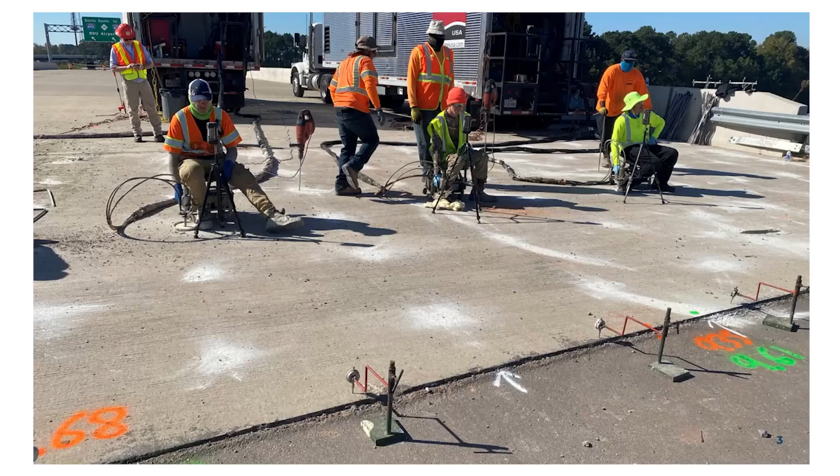Regardless, it's a problem, because we're spending hundreds of thousands and millions of dollars doing this, or grouting. These guys here are injecting polyurethane foam into a settled approach slab. We have DOT crews that do it internally with grout. We're spending lots of money when our approach slabs settle to jack them back up so we get a good ride, so we're not jumping on these bridges. It's a major problem.

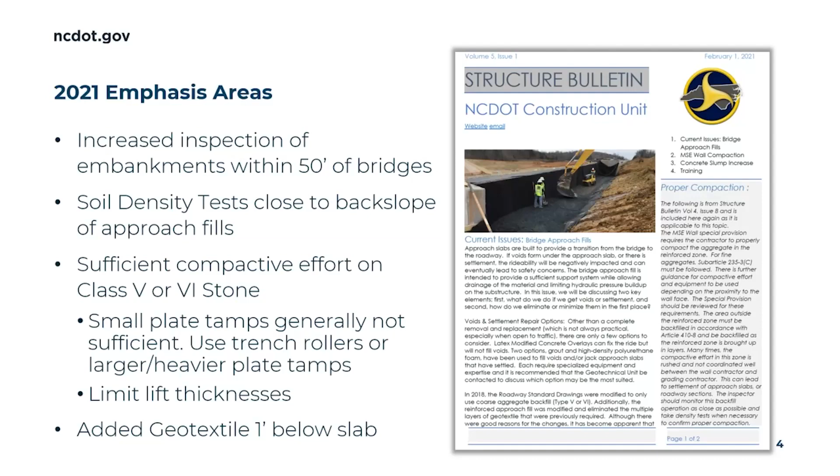So in 2021, we sent out a structure bulletin - now you all know how to get a hold of the structure bulletins since you've signed up for them. We also wrote a memo from the state construction engineer with some emphasis areas because we were seeing a lot of issues. We said we want increased inspections within 50 feet, taking more soil densities close to the back slopes, and more compaction on our stone in the backfill area, limiting the lift thickness of the stone in that area.

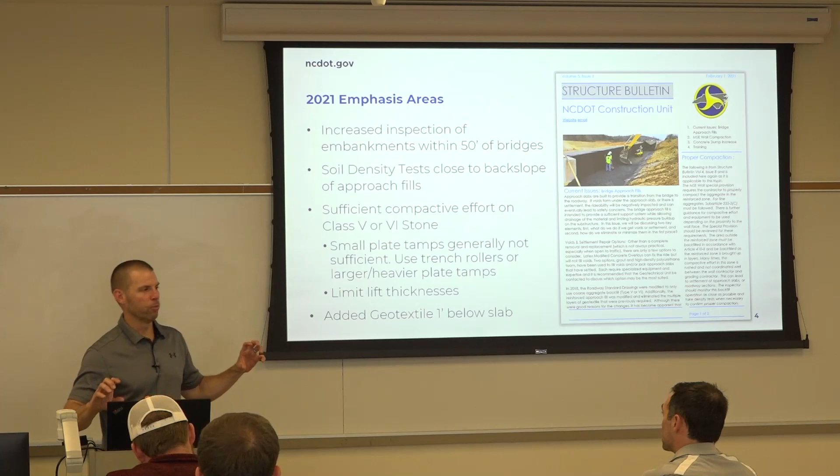We added a layer of geotextile a foot below the approach slab. The reason is our approach fills are filled with 78M or 57 stone, with a lot of voids in between. When you inject polyurethane foam and grout, where does all that grout go? Into those voids. So we added a layer of geotextile a foot below, so that when they have to pump, it gives it some base to not continue going through, and they can actually jack it up without wasting material. Those were our emphasis areas.

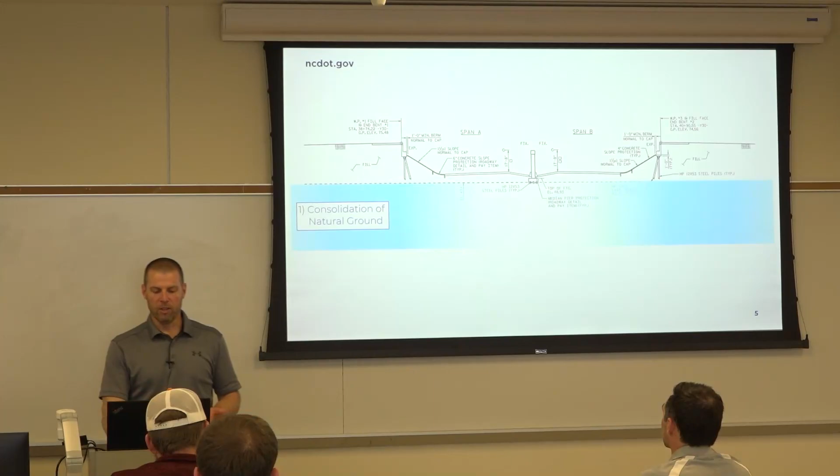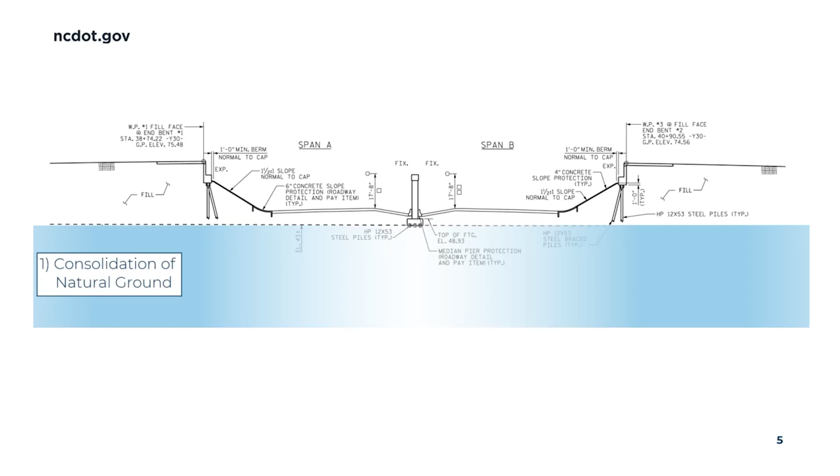Still having some issues, so let's look at where we can get settlement from. When we put an embankment where there wasn't one before, that new load is going to consolidate the ground - it's just going to happen. It's dependent on the type of soil, the amount of water, and so forth. So you can get consolidation of the natural ground.

When we build our embankments, we have specs and take densities, but depending on the material, how well they do that is just a representative sample. If they put too thick of lifts, don't build it properly, or don't get enough compaction, we can get settlement in our embankment. The third place is approach fill settlement, where we're putting stone in - we can get settlement, lose material, get voids, and that starts to lose more material.

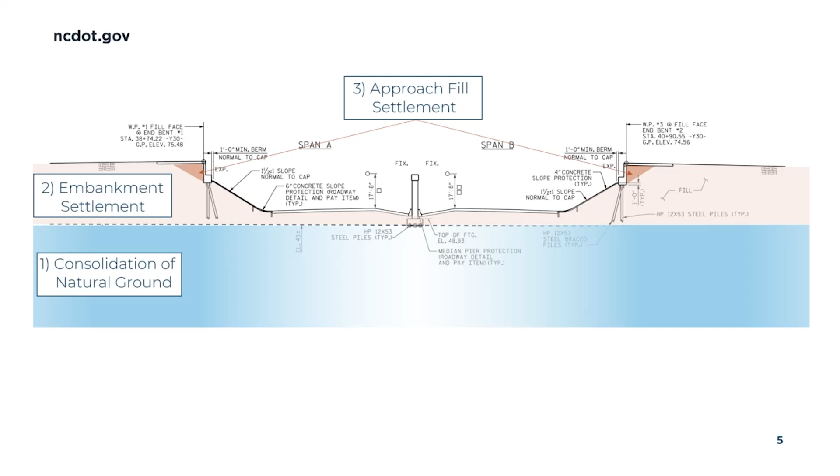Which ones do we have control over in this room since Tom Santee and Geotech left? Approach fill and embankment, if you're a roadway inspector - we have that control. Number one, the consolidation - Geotech's going to tell us that. They know, they've got it modeled, they know the borings, they know how much weight we're putting on from that embankment. They can predict pretty reasonably close how much settlement over time they can anticipate, and it's going to happen, so they account for that.

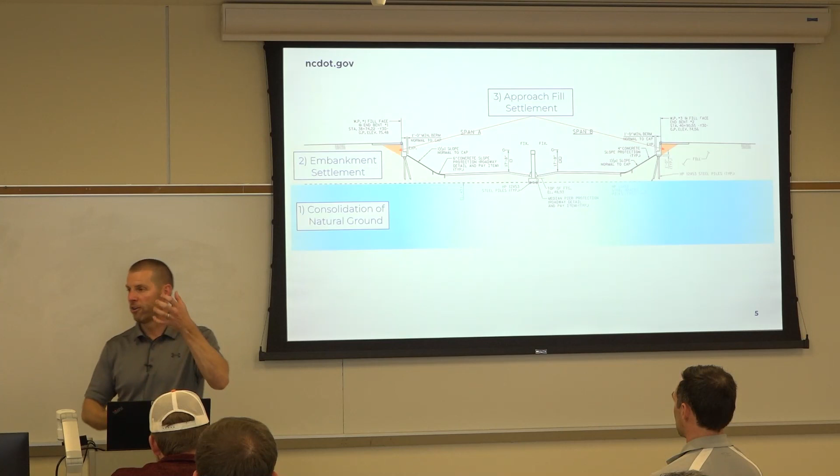Have you ever had a settlement period on your project? You build it up, wait a month, 2 months, 6 months, monitor it sometimes - that's up to Geotech, we trust they're doing that right. The next thing is embankment settlement - sometimes we have settlement times on that as well. Geotech won't have that modeled as much because we don't know exactly the material they're going to use, but proper installation and density tests to confirm they're doing it correctly can control if we have any settlement there.

And then the approach fill settlement, based on how good of a detail we have and how good of a job we do building it - those are things that are in our control.

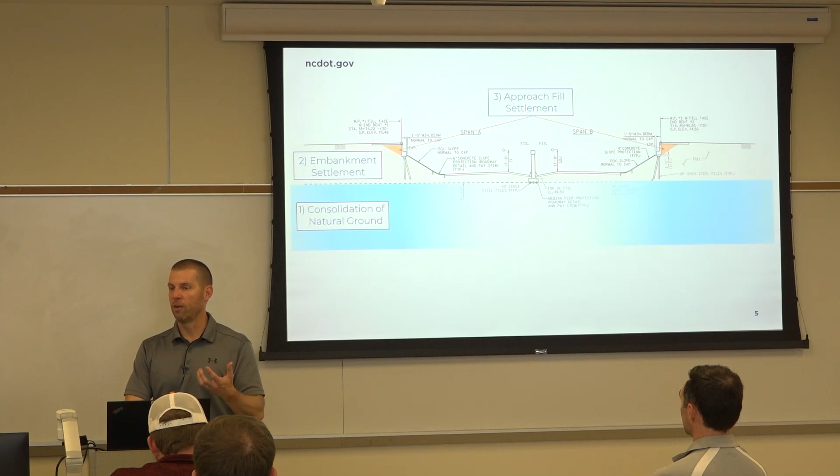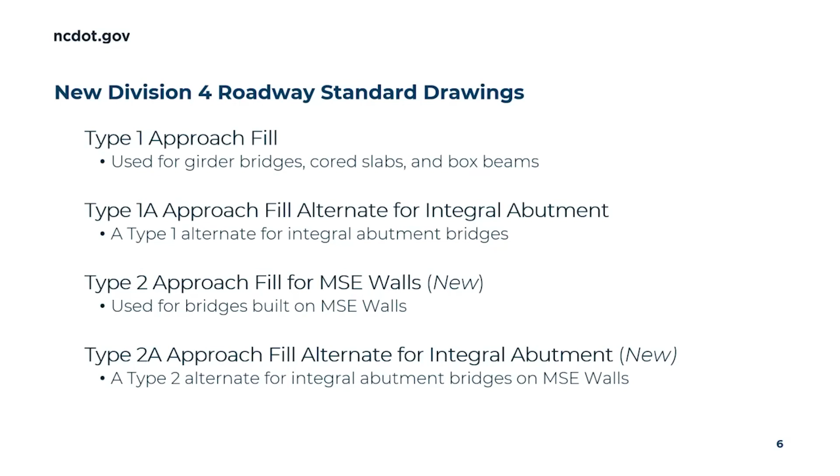We're in the middle of updating our roadway standard drawings, just like we are the specs. We're looking at doing 2 different types of approach fills with alternates for integral abutments. Integral abutments are when the concrete's poured around the ends of the girders, and instead of having an expansion joint, they move back and forth as the piles bend a little bit. Contractors sometimes build a temporary fabric wall behind it, because you don't pour the top part of the integral cap until after the deck is poured - it's the last thing you do. They build that temporary wall so they can walk right up on the deck instead of having a big hole there. That's what the 1A and 2A alternates are for.

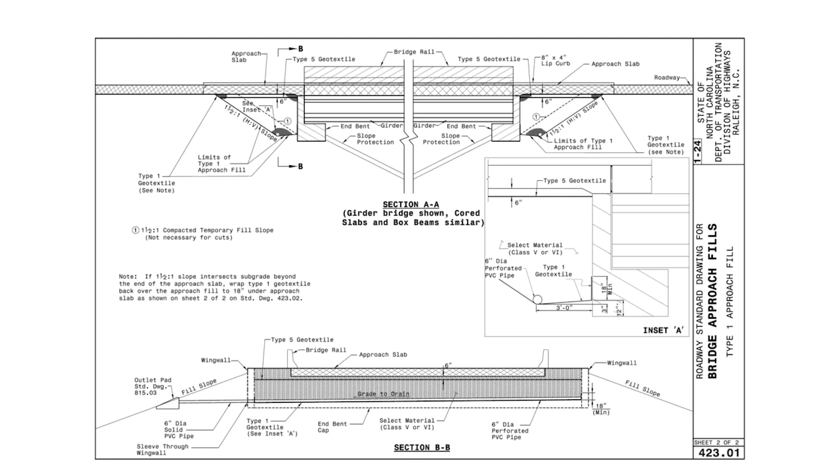So we thought we were done with these drawings. We've been talking about this for about 2 years now, since 2021. We had proposed changes, and we realized there was an issue with our details about 2 or 3 weeks ago in Winston-Salem at the structure training, so we're kind of back to the drawing board, but I'm going to show you some of the changes we're making.

First of all, we're going to continue to show that geotextile below our approach slab. It's going to be 6 inches, at least that's where we're showing it right now.

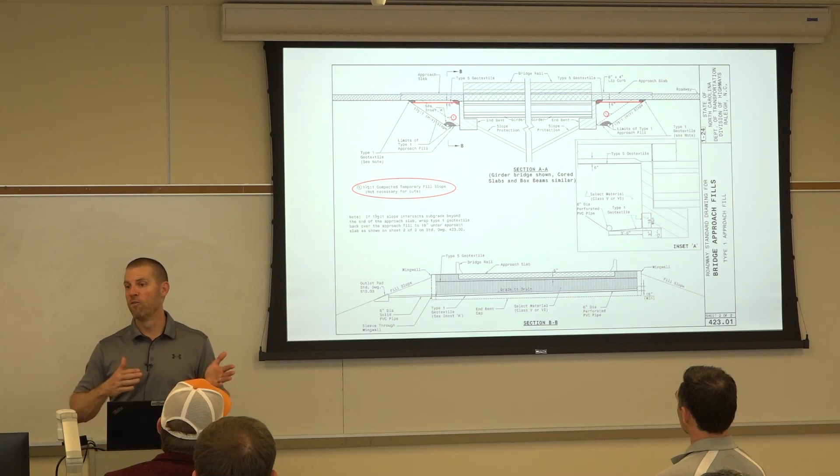This is one of the big changes I think is going to improve things. We're going to actually require a temporary slope. They're going to have to overbuild the embankment, right? Because right now our specs, if you got an embankment, all they have to do is build it to the bottom of the cap. Years ago, we used to make them build the whole embankment all the way up.

Then they had to cut back out for the end bent. Well, now the specs allow them to build to the bottom of the cap, and that allows them to start on the bridge construction. But what we're going to do is, when they finish building the rest of this embankment out of soil, we're going to make them overbuild it. The reason is when you compact that edge, you're not going to get all the way up on that roller - you can get close to it, but you're not going to get compaction all the way to that edge. So we're going to make them build that 3 feet more, and then they're going to cut that back out so they've got good compaction in that area.

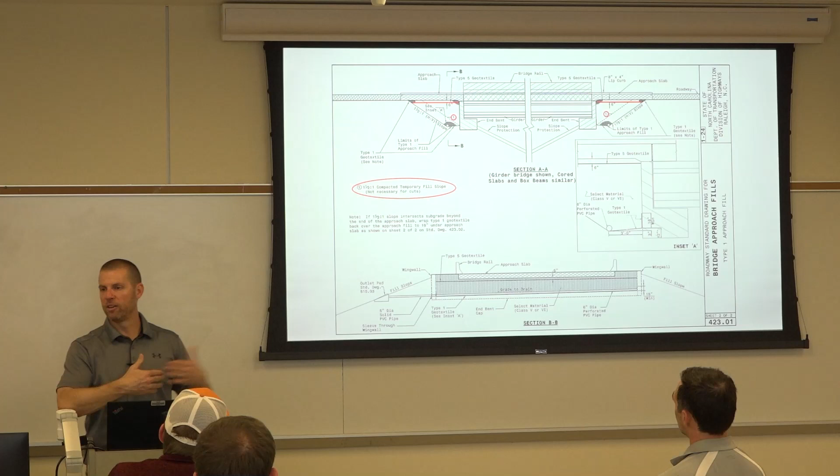So we feel like that will be a big improvement. And then this back slope - there used to be 2 different details. One was for our sub-regional, like cored slabs and box beams and so forth, and it was sloped at 1-to-1. And then our other bridges, you'd slope it back like 4 feet beyond the approach slab. This one, we're basically saying you're just going to go 1.5 to 1. Wherever it ties on the approach slab is where it ties. So that changes - kind of combines those 2 details.

And we're also going to raise up the bottom of it about a foot, 12 inches or so. You see our pipe here - this is where we found the problem. You see how by raising it up it forces you to go through the wing wall. We want to raise that up, but the problem that somebody pointed out is when you do that and have that fixed point on the wing wall, if you get settlement, we've had that pipe get crushed and broken and break the joints.

So what we're talking about doing is just eliminating the pipe. We'll still have it drain to that spot and drain over to the wall. It'll go through the type 1 geotextile - we might put some hardware cloth there, and it'll just drain through. We'll still have a pipe that sticks out from the wing wall out to our drainage.

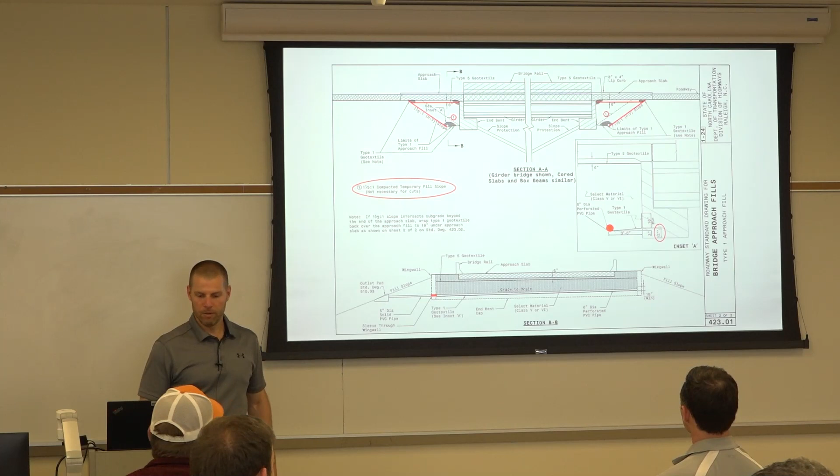What's that? Oh, okay. Sorry. Yep.

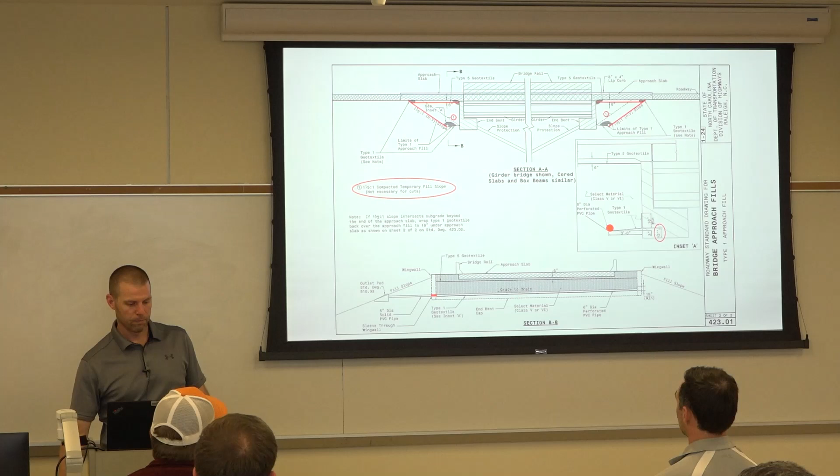Okay, so there we go. See through our wing wall there - that's the sleeve. So we're still working out the details. You'll see what the final details show, so don't get too hung up on that. We'll get those out and they'll be ready for the spec.

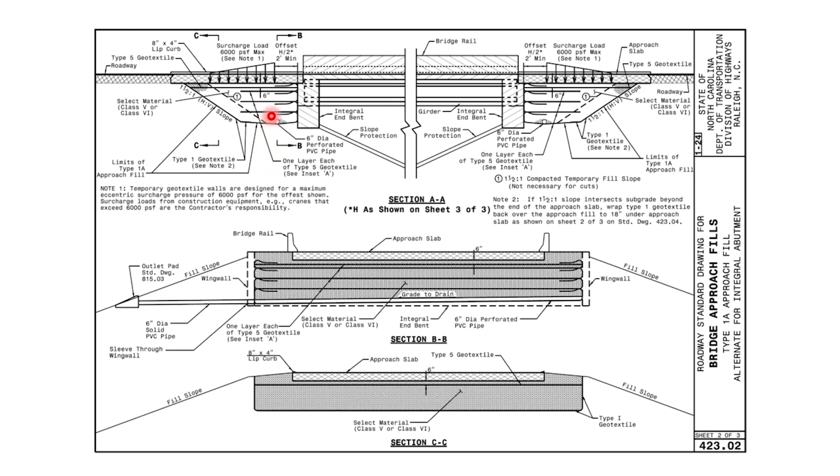This is the alternate for the integral abutment. You can see the temporary wall that you can build up here behind your integral end bent.

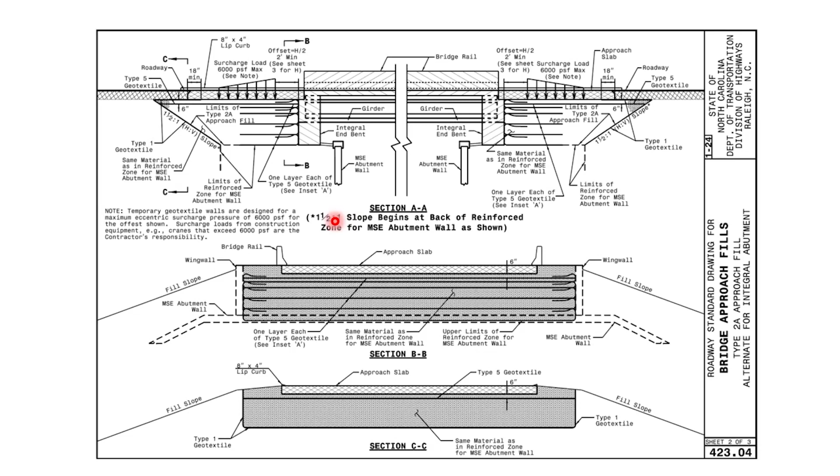This is a detail for MSE walls. Currently these are in your set of plans, but they're not a standard drawing. These have not really changed much from what's in your plans, but we're going to make it part of the standard drawings. And then here's the alternate for the integral, for the integrals with the MSE wall.

So again, don't want to get too hung up on this, but I do want to drive home some points here. We've got these emphasis areas, and the special provisions are actually going to require some of these things instead of them just being an emphasis area. So we're going to start saying you have to take a density every 2-foot lift when you're within 50 foot of a bridge. So if you're a roadway density person, sorry, it's a little bit more densities, but we want to ensure there's more samples - we're getting really good compaction in that 50-foot range.

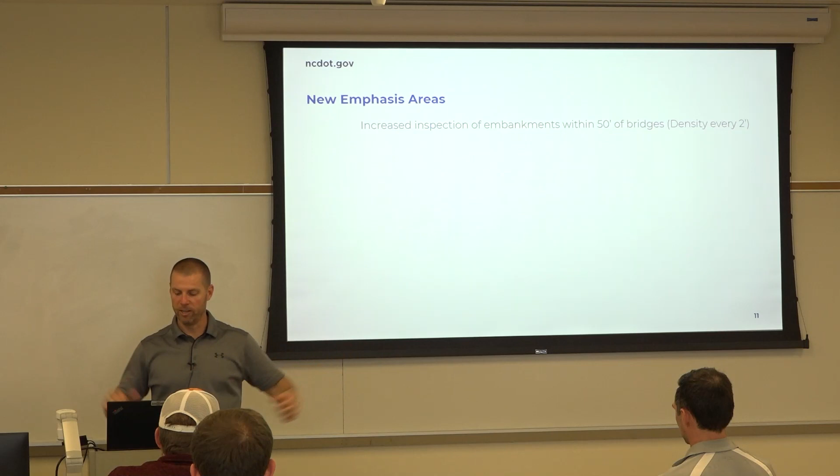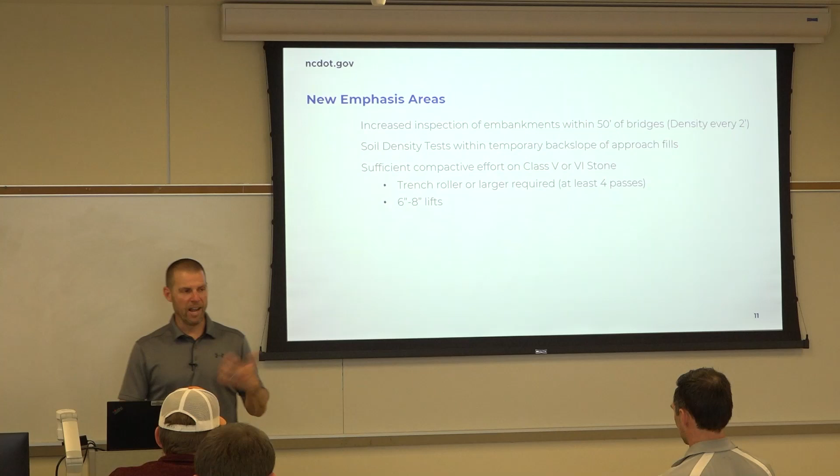That area around where we're cutting back to, we want to get some densities in that area to make sure they're getting good compaction in that zone. We're going to actually require smaller lifts on our stone. Some people think that stone is self-compacting. It still requires some compactive effort, and putting in a 12-inch lift with a little small plate tamp is not getting it. We've got to put it in with like a Rammax, a trench roller, and smaller lifts. Okay, so that's going to help.

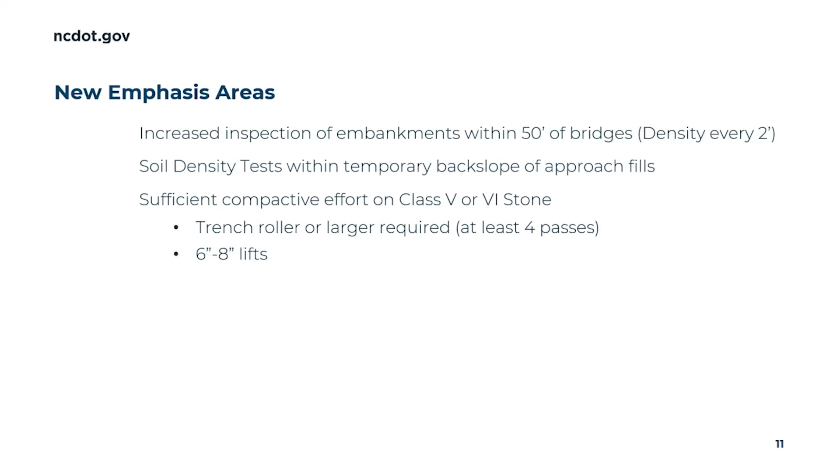One thing we have noticed, MSE walls, a lot of times we'll build them out of stone. You're putting big smooth drum rollers in there. We don't notice the settlement like we do in our approach fills. So some of that's because they're rolling it more. We can't still get those big equipment in there, but we can get a little bit heavier equipment, and we can roll it more and do smaller lifts.

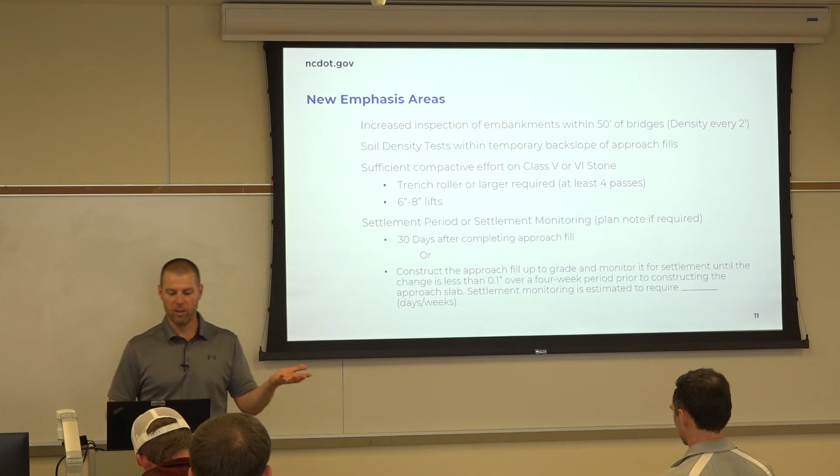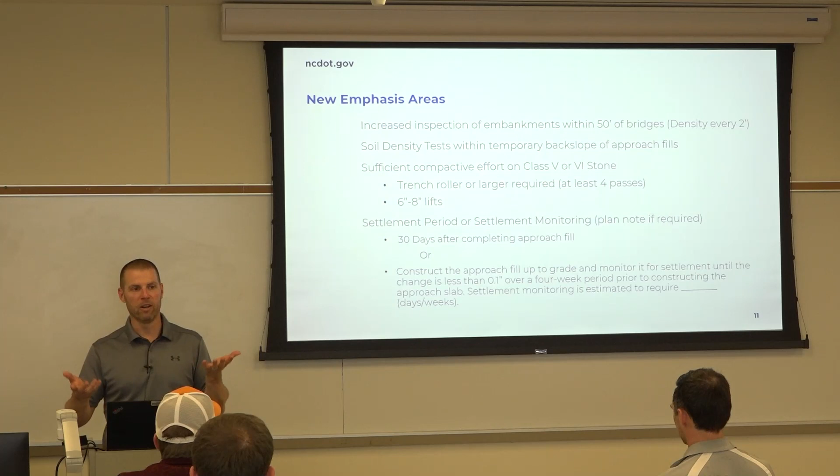And then we're going to be looking at either, it might be in your plans, you might have like a waiting period after you do your approach fill, or they're doing this in the West, they're actually driving hubs in their approach fill, and they're shooting them weekly or every few days, and they're monitoring the settlement. They're putting something like it's not a settlement gauge like the full settlement gauge we do sometimes on our embankments, but they're just doing this as a plan note and putting hubs in there and shooting it until it stops settling to a certain amount, and Geotech would make that decision. They could put in there that it's estimated to take 1 month or 2 months, so the contractor knows. So those are some of the things that you might see in your plans.

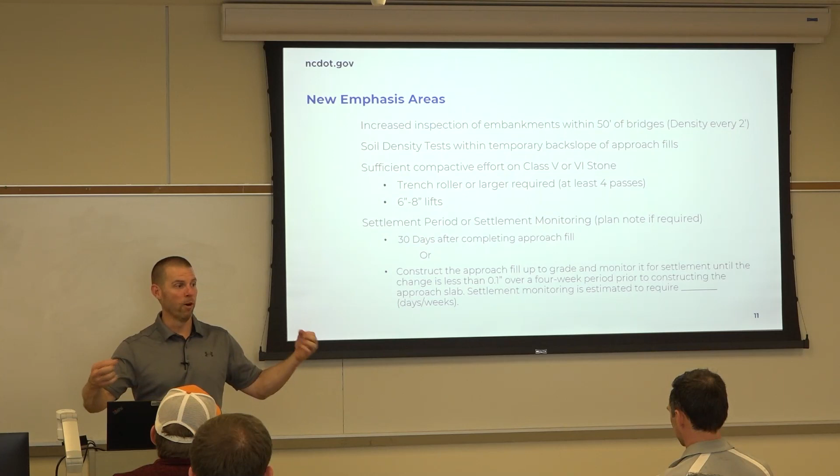Again, time is in our favor with settlement, all right? Do we want to pour our approach slab if it's still settling, knowing it's going to go down? No. So one thing that's not required, but I like to do is I like to shoot a couple points on the approach slabs, mark them, and then when they pour it, so that I know, sometimes they pour them low, right? If they pour them low, then we're starting off low. That's a bad thing because it's going to go down, right? So I like to know my starting point. So that's a good check to do.

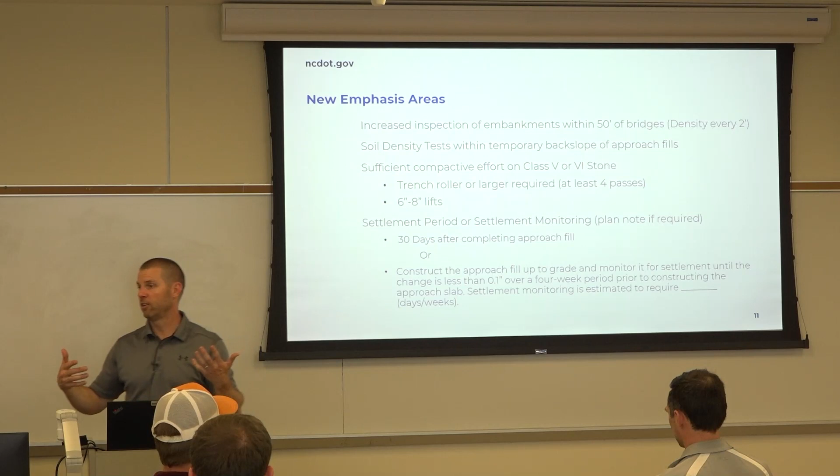How do you set into your approach slab? Do you shoot it by the theoretical grade when you pour your approach slab? Is that how y'all set your grades and your headers for your approach slabs? Or how do you do it? String line, right? Do we build things perfectly? We try to, right? But if I build my deck off and then I set my approach slab to a theoretical grade, they might not match. So I'm pulling string lines, right?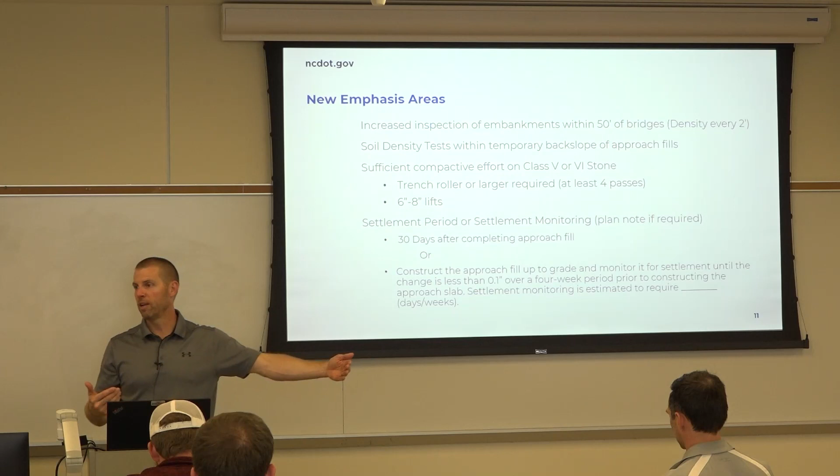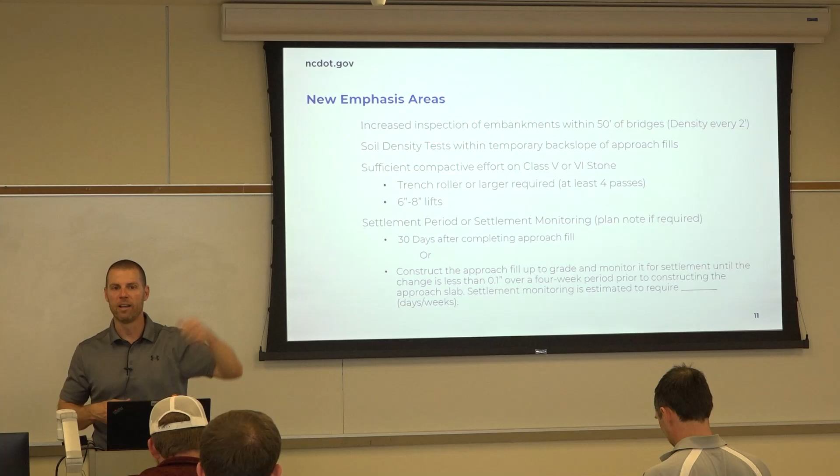But what if I'm in a vertical curve? Can I just rely on that string line? I've got curvature in it. Now, granted, it's only maybe 25 feet or 15 feet. There's probably not a lot. But if I string line off that bridge and pull my string line from my approach slab and I haven't taken into account that vertical curve, I might be setting my grade wrong on my approach slab. So you got to take that into account. You might have to shoot some shots and plot it and build that vertical curve in to set your header. Those are some things you can do. But definitely think about the string lining. Don't just let the surveyor come out and shoot you a shot. Say this is what the theoretical grade is and pour your approach slab to it. You're going to start off wrong.

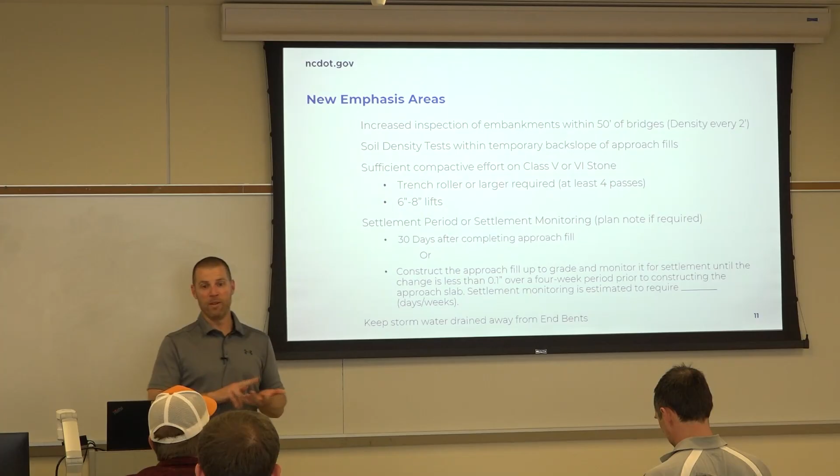Finally, keep the water away from the end bent. How many people have had an end bent wash out because the storm drainage has come and washed out underneath your end bent? Whole bunch of hands up here. Once that happens once, it's never going to be as good as it was originally. When you pour your end bent, keep the water away. There's details with berms and slope drains.

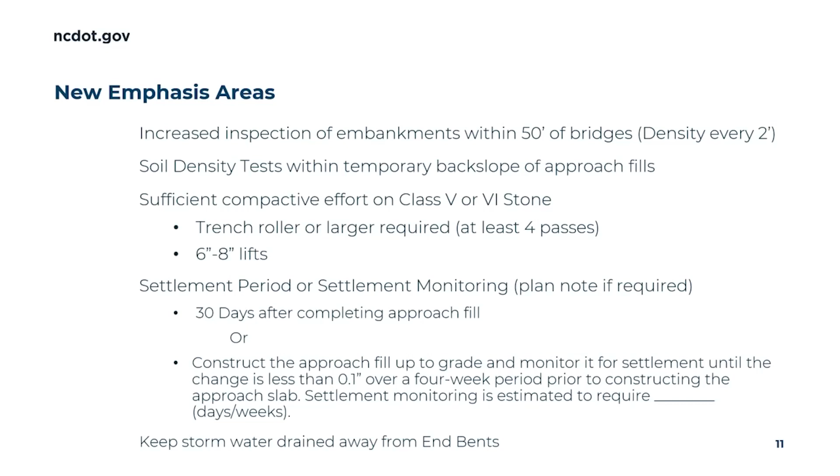Once you fill up your approach fill before you pour your approach slab, same thing. That stone will wash away. Once you pour your approach slab, water's coming out your barrier wall, your deck, water's coming off your bridge. It's coming down there. It's going to wash away. All those phases, you've got to control that water. If you don't, it's going to start undermining, creating voids. Once it does that, we have a potential place to lose material from then on out. We're going to be out here spending hundreds of thousands of dollars pumping these things up.

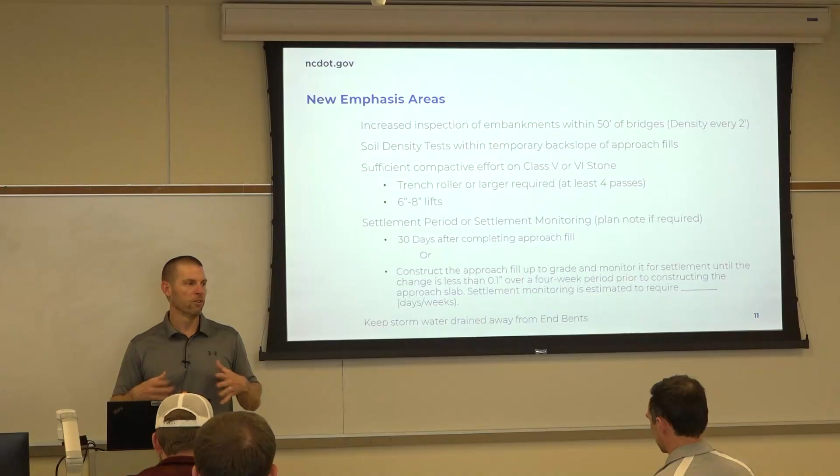You can get the contractor to flow fill it during the life of the job, but what happens when they're gone? We're dealt with. It's our maintenance costs. So we've got to do this. If they don't want to do it, it's hard sometimes. Got a roadway contractor, bridge sub. If they don't do it, residents, assistants, shut the work down. You got to control the water.